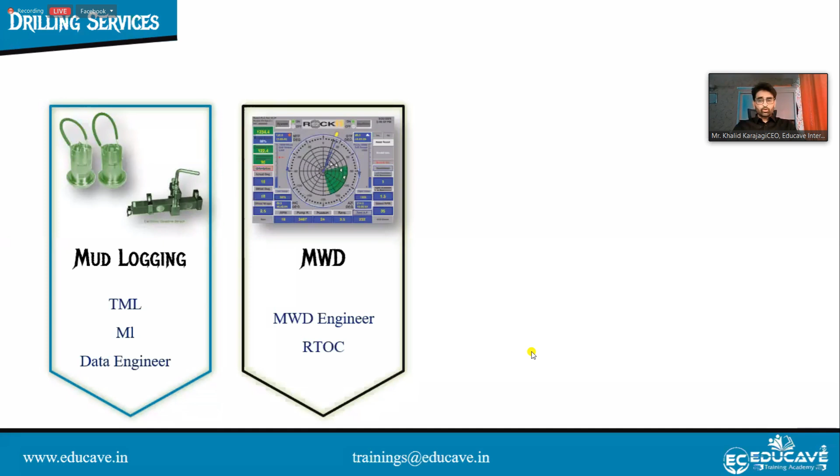Along with that, when we talk about the formation, we have LWD. This is a technology that we use to acquire formation evaluation data while the wellbore is being drilled. Unlike wireline operations, we get the data during the drilling operation. Formation evaluation data in real time really helps us take real-time decisions and reduce non-productive time by eliminating the need to halt drilling. If you want to conduct wireline logging, we stop drilling, we pull out of hole, and then we go in with the wireline tools. So compared to that, this saves non-productive time.

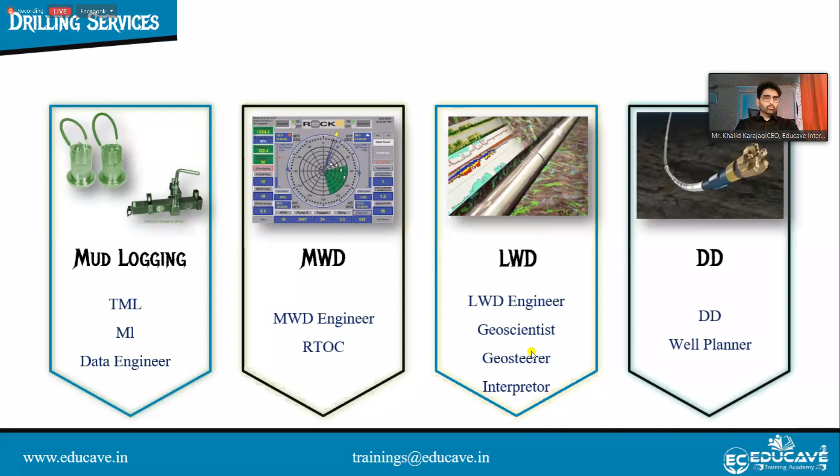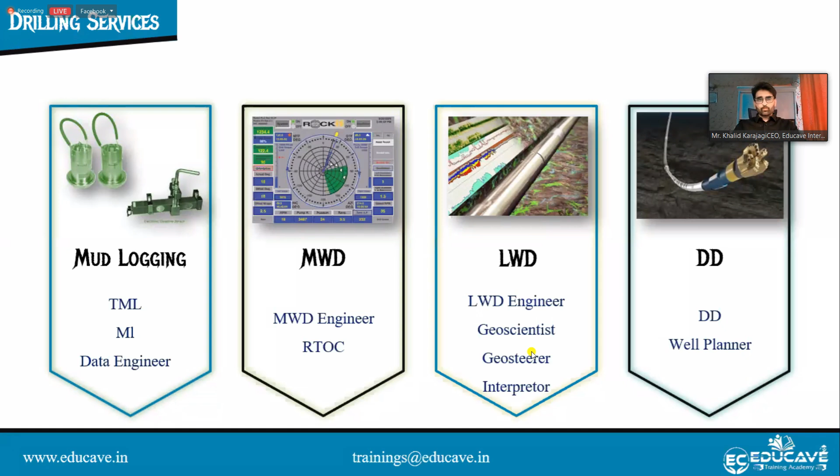Last but not the least is directional drilling. So on a macroscopic view, these are the four services that are used in drilling operations. There are a lot of job opportunities in these services now, so that was the reason this topic was chosen. So let's hope that we have a productive session.

To start with, MWD services. As we just talked, it's a service in which we get real-time instantaneous data from our non-mag MWD tool, which helps us with wellbore positioning. When I say wellbore positioning, it's all about directional drilling and drilling optimization. So with the help of real-time instantaneous data from the MWD tool, we can achieve wellbore positioning and drilling optimization. Most drilling operations nowadays have MWD services.

It's also a process of acquiring measurements from this kind of MWD tool, usually a non-mag tool. So why do we have non-mag? It's because there is one sensor in the MWD tool that can get affected by the steel body. That sensor is called the magnetometer. That sensor is very important to understand the hole direction, that is the azimuth. We have some slides on that, and we'll see how deep we can go in 1.5 hours. So basically, in MWD services there is an MWD tool which has sensors that sense the data and transmit it to the surface in real time.

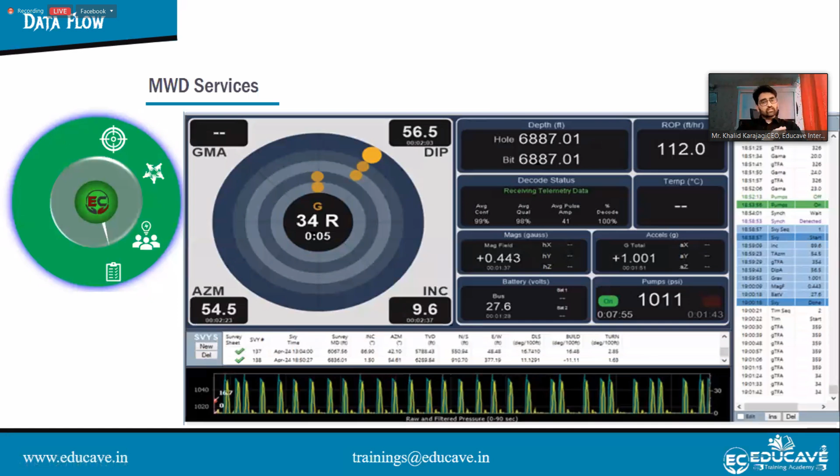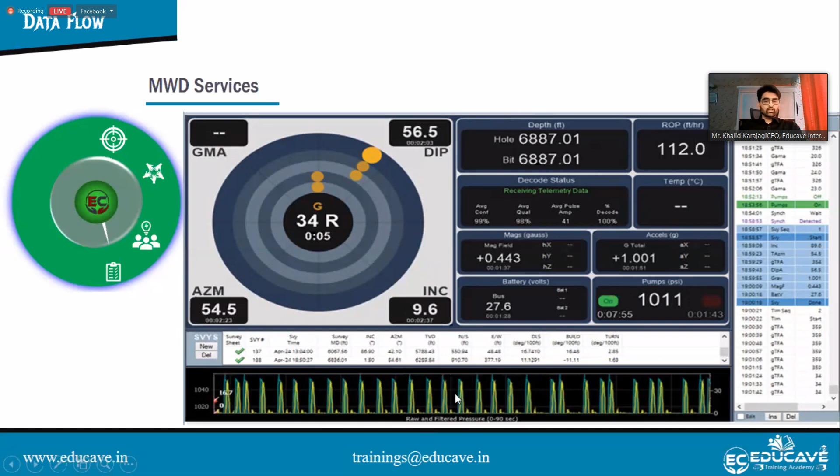So in MWD service, there is a tool that senses the data. Through the pulsar, you send that data to the surface. On the surface, there is a standpipe pressure sensor which acts as a receiver. From the standpipe pressure sensor, we get it through the cable. The pressure pulses travel to the standpipe pressure sensor, get converted to electrical pulses, and then we get it on the surface in our unit in this format. And that is how we get data, guys.

So this is the graphical representation of that. The tool senses the data and sends the data in binary format to the pulsar. This pulsar creates pulses. So how do you create pulses? Pulsar is basically a tool that has a poppet valve and it obstructs the flow of the fluid. When it obstructs the flow of the fluid because of your control valve assembly, there is an increase in pressure, and that increase in pressure is called a pulse. And this change in pressure is detected by your standpipe pressure sensor, and this is nothing but your pressure pulses.

So the pulsar, by obstructing the flow, let me check if I can show you. Okay, so there is a tool. This, for example, is the pulsar. There is a restrictor over here inside this, and there is something called a solenoid activated valve. This keeps moving up and down. This solenoid is spring activated. So once this valve body goes and sits in this restrictor, the flow of mud that is coming from the top, from the drill string, is obstructed over here. So the pressure was like this before when it was down.

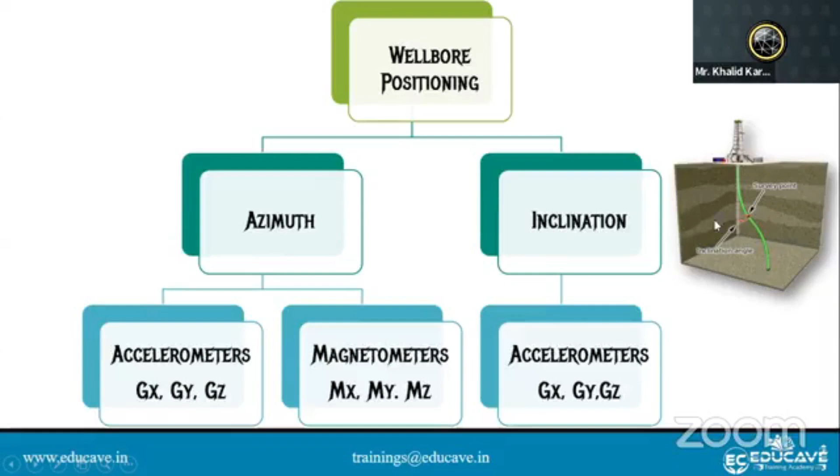Inclination is an angle measured in degrees, the wellbore to vertical plane. So whenever we say that, that means the inclination is 0 degrees. When we say that we are increasing the inclination, drilling a 90 degree well, that means the well is this way. So the inclination is 90 degrees. That is inclination. What is azimuth?

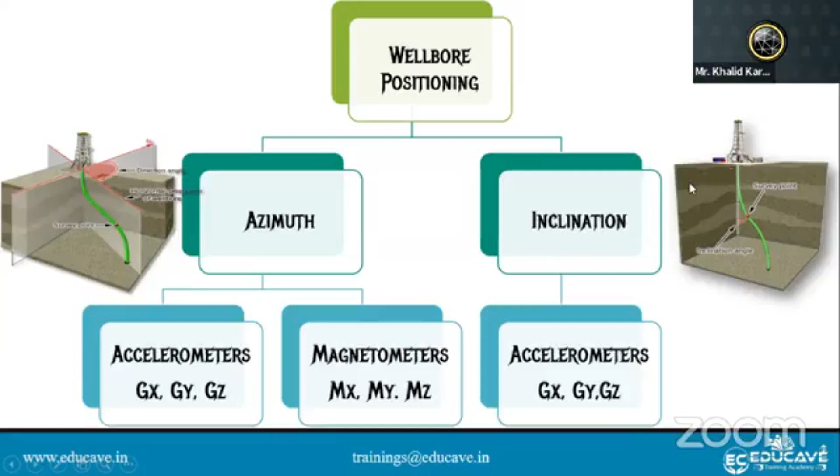Azimuth is the hole direction with respect to north. Is the hole going in this direction, in this direction, in this direction? That is called azimuth. So again, BHA placement plays a very important role, guys. For inclination, your stabilizer placement will play a very important role. For azimuth, your non-mag spacing will play a very important role, because as I told, the magnetometer is a sensor in the tool that calculates this.

However, if your steel body or drill pipes are near this particular tool, which is non-magnetic, there is a high possibility that it can magnetize the tool, and the data the magnetometer is getting is not only the Earth's magnetic field, but also of this. So because of this, it will not pass the quality check. As someone asked me, this is something that we check. So it might not pass the quality check, and that will let us know whether we have to accept the data or not. So this is wellbore positioning.

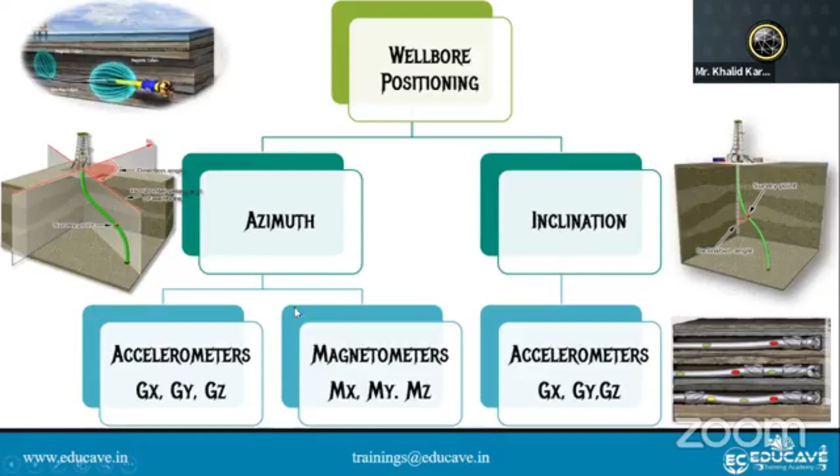Okay, can someone tell me how much time we have so that I can plan accordingly? What was told to you? Is it a 1 hour, 2 hours lecture? How much? Sir, it was from 1 hour to 1 hour 30 minutes. Okay, so we'll go ahead with a few slides. After 15-20 minutes, whatever we cover, we can take questions and answers. Sure, sir.

Okay, so with respect to drilling optimization, guys, for MWD, these are the 3 sensors we talked about. With the help of the pressure sensor, we understand the hole condition, with the help of ECD. With the help of temperature, we understand, for example, the sensor limitation with respect to temperature. For example, if while drilling the temperature is this and suddenly there is an increase in temperature, there is a vague interpretation we can make. There's only one fluid down there which is at higher temperature, that is formation fluid. If there is an influx, there is a probability that an increase in temperature might happen. So it's all about interpretation of real-time data.

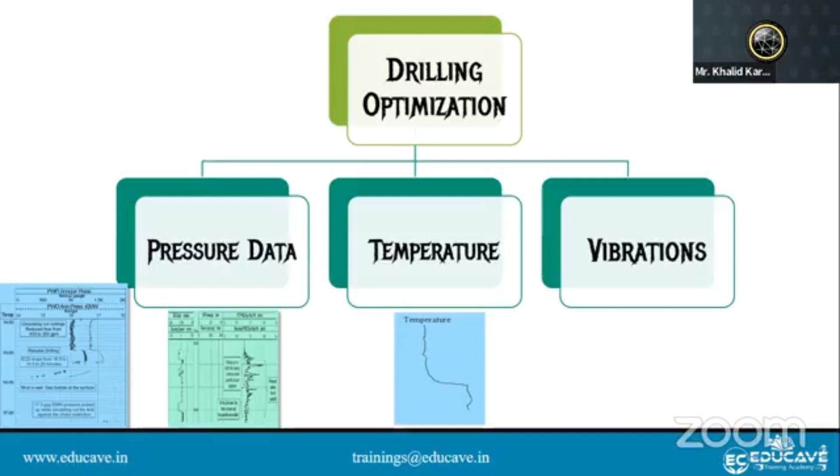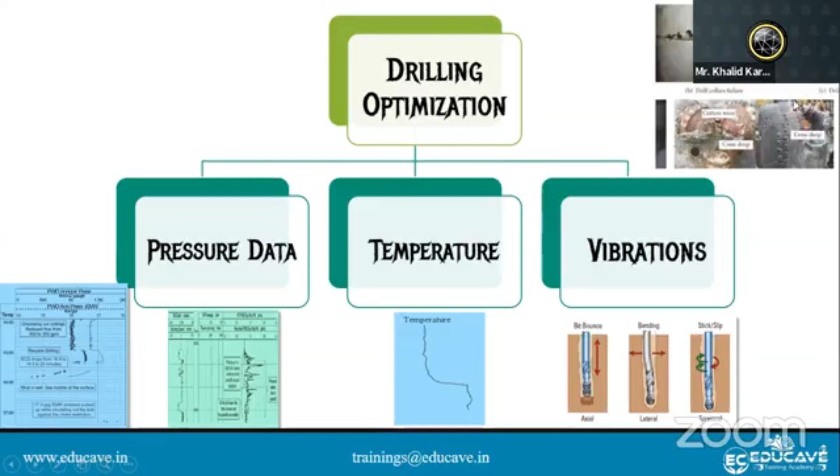And the third is your vibration. This is your bit bounce, that is axial, lateral, and torsional. So with this data, okay, this is the effect of your vibration, guys. The bit damage, the wear and tear of the tools and all. So with this kind of real-time data, we can interpret what needs to be done. For example, here, as I was seeing, there is an increase in ECD. And if you do not understand this language, what is happening over here, and you keep continuing drilling... What is ECD? Equivalent circulating density.

For example, if your drill cuttings are generated and they are not able to be lifted up and are accumulating in the annulus, there is a probability that this can cause an increase in ECD, a pack off situation. Because of this, there is a probability of downhole mechanical stuck up. So with these kinds of indications from your sensors like annular pressure, if you can read it, what you can do is stop drilling and use another function of drilling mud, which is to get the cuttings out of hole. So for all the cuttings that are accumulated, you can stop drilling, not generate more cuttings, and clean the hole. We call it hole cleaning.

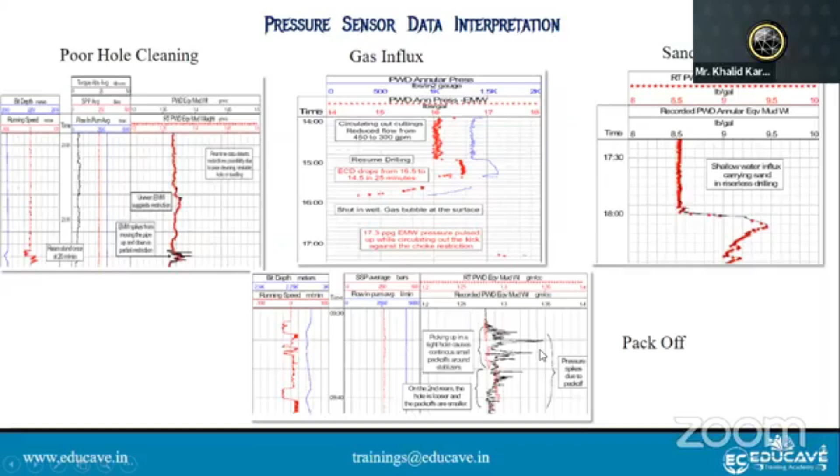So once you clean the hole, what will happen? The ECD will start coming back to normal. You're not generating more cuttings there, and you're not loading the annulus. So these kinds of interpretations can help keep the drilling environment optimized. Okay, talking about directional drilling, I won't get into much detail. As everyone knows, directional drilling is a service in which we try to achieve a target.

So there are 2 directional drilling tools the industry usually uses. One is your mud motor. Second is your RSS, rotary steerable system. So our job is not only to know what directional drilling is, like you know about inclination, you know about azimuth, but how to do it in reality. So with the mud motor, there is something we call tool face.

What is tool face? Tool face is an angle which describes where the mud motor bend is pointing. If you know this direction, you can control the bit walk, or you can control the bit direction. So if you want to increase the inclination, for example, you need to know what the tool face is. If I keep the tool face at 0, the inclination will increase.

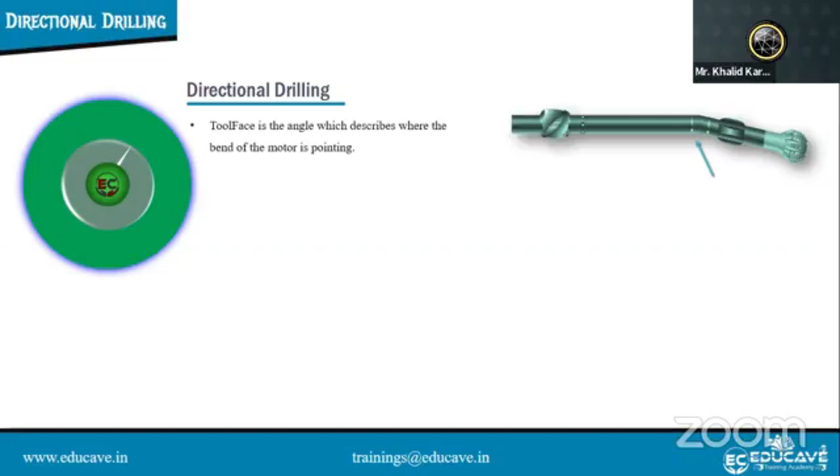If I keep the tool face as 180, the inclination will decrease. If I keep the tool face as 90 degrees, then the inclination will not change, but the azimuth will change towards the right direction. So you should know about this also in directional drilling. This is what I was talking about. Because we get only one chance to put the hole in the right direction, guys. In our industry, this plays a very important role. You cannot mess up with this data.

And all this data, the tool face data and all, we get it from the MWD tool itself. So no directional drilling can happen without MWD services, because the MWD tool is the tool that helps us to understand what this tool face orientation is. Okay, so this is about directional drilling.

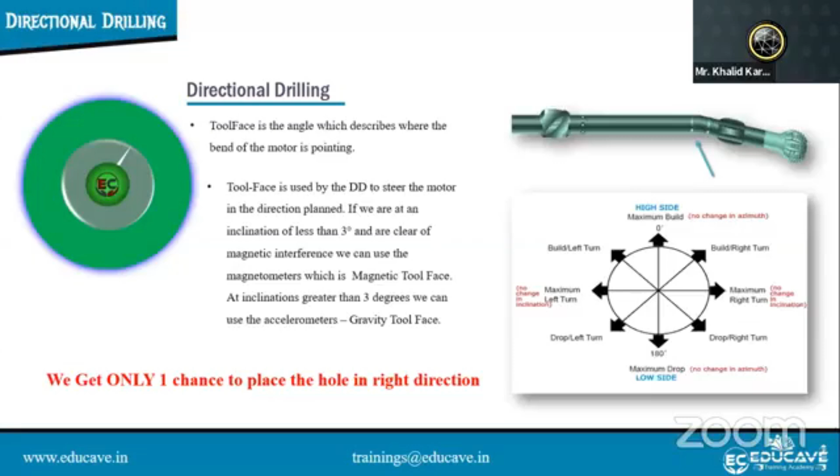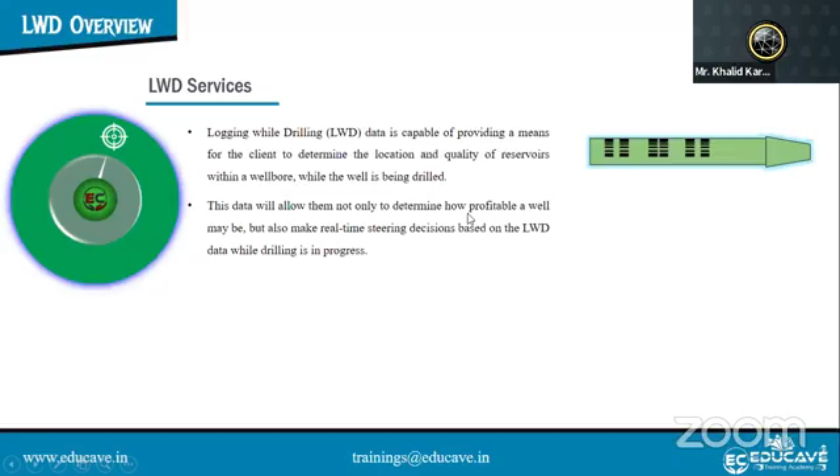Okay, as someone talked about LWD, we already talked about it. LWD is a service in which we get real-time data of the formation, nothing related to directional drilling, nothing related to drilling optimization. Any tool, any service that gives you data about the formation, that is logging while drilling. So this data will allow us to understand where we are drilling. Do we really have hydrocarbon present out there? If yes, how much, and everything.

So for LWD, why does the industry need LWD services? Because they want to know, can they make money? When they say money, they want to know, is hydrocarbon present there? If yes, where it is, how much it is, and can they produce it economically? To get the answers to these questions while drilling, we use LWD technology.

With this data, they try to take decisions of optimized wellbore positioning, of reservoir characterization, so all this data is used for high value decisions. So it is very, very important that this data that we are providing in terms of logs is high accuracy, comprehensive, quality data only.

As a petroleum engineer, as a geology student, understand one thing, guys. A tool is developed to give you raw data. The tool gives you raw data. To convert that raw data into quality data, it is your job, because you need to understand the downhole effects, the borehole effects a tool can undergo. Only once you understand that can you apply corrective action. For example, what I'm trying to say here is,

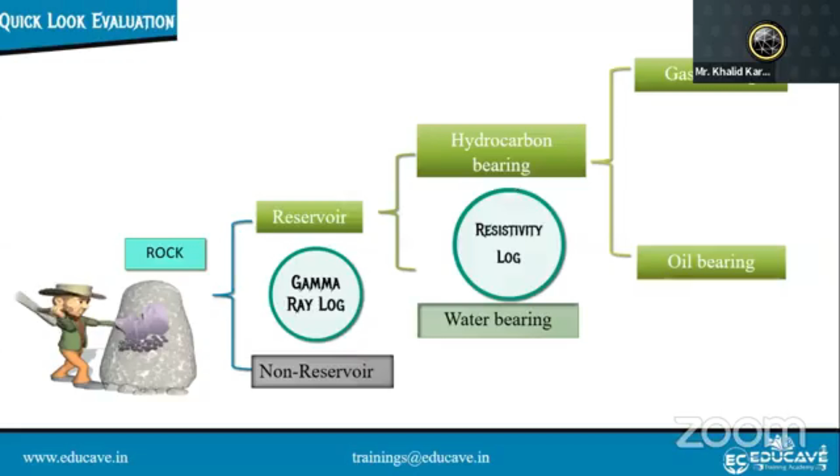So as a petroleum engineer, I would suggest not only to understand, for example, what you guys understand. Okay, when we are drilling a rock, if I want to know whether it's a reservoir rock or non-reservoir, whether it's shaly or non-shaly, there is the gamma ray tool. Once it's reservoir rock, whether this reservoir is water bearing or oil bearing or hydrocarbon bearing, we have the resistivity log. Once we understand it's hydrocarbon, whether it's gas bearing or oil bearing, we have neutron porosity and density logs. This is what you have studied, but this doesn't end over here.

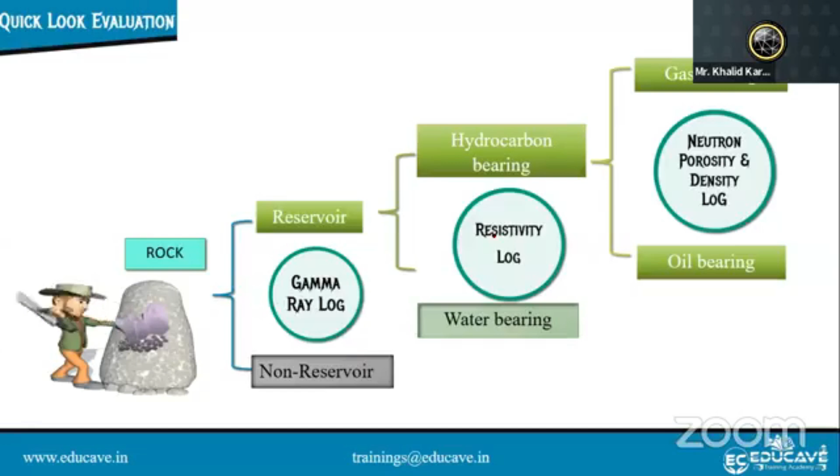You need to understand the resistivity log, what are the different resistivity logs, which are the different curves in resistivity logs, what is attenuation, what is phase difference, all these things you need to understand. So I think the time is limited, but I would suggest, Zaki, if students are interested, try to get a logging while drilling webinar also, because there's a lot involved in it.

For example, if this is the log, right? This is a gamma ray. The gamma ray log is basically used to understand whether it's a shaly formation or non-shaly formation. So I'll just give you a brief idea. What is gamma ray? Gamma rays are naturally occurring radioactivity emitted by isotopes like potassium, uranium, and thorium. Potassium, uranium, and thorium are mostly in the clay particles. So whenever there is high gamma ray, there is a probability that potassium, uranium, or thorium are present. So this is shaly. High gamma rays are usually termed as shaly formation.

Low gamma rays, non-shaly. My zone of interest is this in the first track in quick look interpretation. Once I understand it's non-shaly, I check the resistivity. Resistivity is a log that tells us whether it's a water-bearing zone or hydrocarbon-bearing zone. As of now, I'm just trying to give you a layman explanation. If there is water in a room and I apply current, the current passes through the water because water is highly conductive. Highly conductive means less resistive. Hydrocarbons, on the other hand, are highly resistive.

So see, this becomes my zone of interest. High resistivity is an indication that it might be a hydrocarbon bearing zone. Then we go and check the neutron porosity and density. If there is a crossover in your neutron porosity and density, it is usually a hydrocarbon bearing zone, I mean to say a gas zone. If they are overlapping, there might be a possibility of an oil zone. So this is how we do a quick look interpretation for any log.

Out of these curves, there is one curve which is true resistivity. If you do not take that curve value and take some other curve, the whole saturation goes wrong. The whole interpretation goes wrong. So you need to know that also. You also need to start from basics. These are depth versus data. How do you get a log?

If someone asks you that, a tool, say for example, this is a gamma ray tool. A gamma ray tool has a sodium iodide scintillator detector. So this tool will only understand what the data of this formation is. It doesn't know what the depth is. So you should know how you get a log. A log is always the formation response at what depth. How do you get it? You get it with the help of drawworks sensors and hook load sensors.

So for example, on surface, there is a drawworks sensor and hook load sensor, which tell you at what time, what is the depth. For example, currently it is 3 hours, 15 minutes. The depth is, say, 2136.80. So on the system, I can see this. So from surface, I understand at what time, what is the depth. The tool has a clock inside.

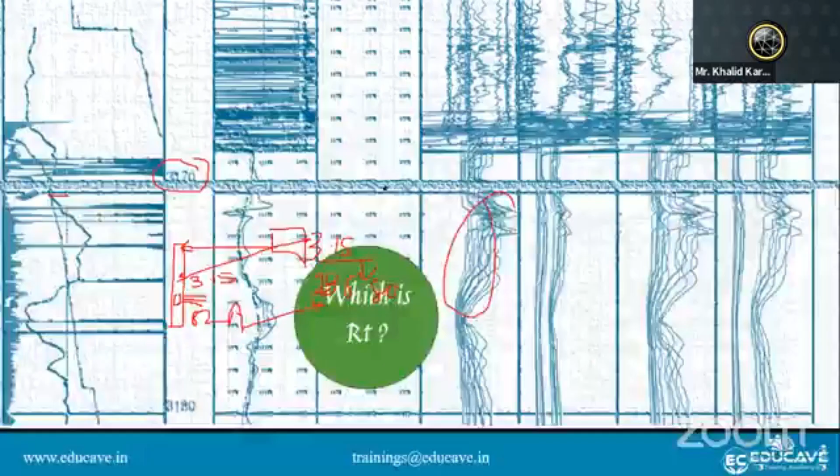I can talk about gamma, resistivity, porosity, density a lot. But now I hope if you ask questions, we can talk on it, because this was mostly an overview presentation on the drilling services. It was an effort from my side to make you understand. It's not only about understanding the definition. It's about, okay, if gamma ray is there, you need to understand what corrections are required. What do you mean by attenuation? What do you mean by 2 megahertz? Why is there separation in curves? So all these things you need to understand. So I hope I can take good questions now.

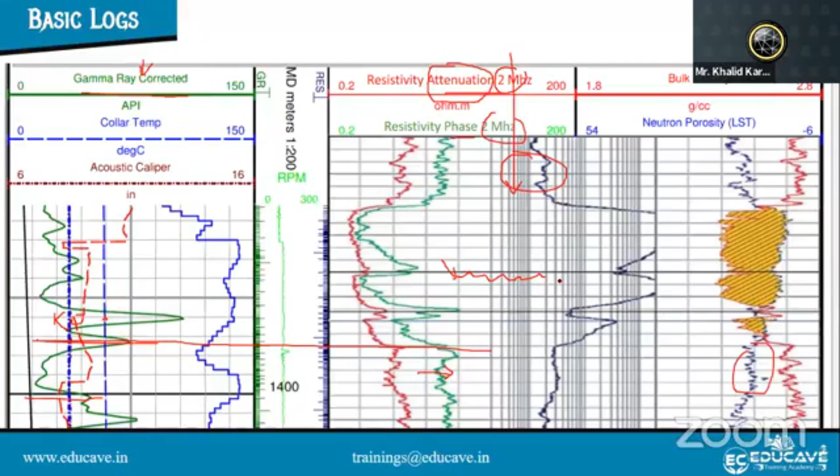So feel free to ask your questions. I'm ready to take the questions now. Any questions as of now? Yes, sir, there are questions. Okay, let me check. How do I check it? Sir, we will convey the question to you. You just answer them. Okay. Just a second.

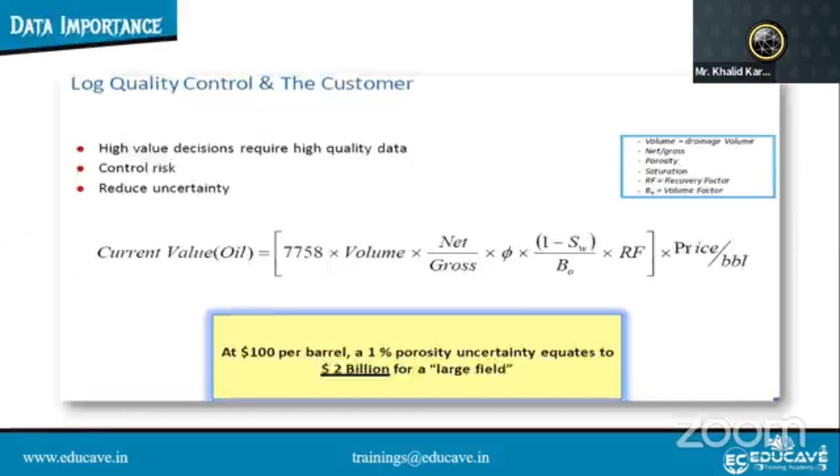So if you see this, where is that? Okay, if you see this log, this curve, 2 megahertz, is a curve that can tell me about thin beds also. This curve will tell me about depth of investigation.

What is phase and attenuation? Phase and attenuation, as I just told you, this is attenuation and this is phase difference. Again, these two have a property. This is an electronic property. To give you a brief, I always call it I effect. I effect means I call this I as in P. P means phase. It is an electrical property of phase that it investigates vertically.

Attenuation has a property to investigate radially. So who will have more depth of investigation? Attenuation will have more depth of investigation as compared to phase. So now, okay, I'll take this. I'll show.

Okay, there are two families in resistivity, I'm giving you a layman explanation: depth of investigation curve and vertical resolution curve. Depth of investigation means something that reads more deep inside the formation. So with respect to 2 megahertz and 500 kilohertz, who will read more deep inside the formation? 500 will read more deep inside the formation. And 2 megahertz will read thin beds well.

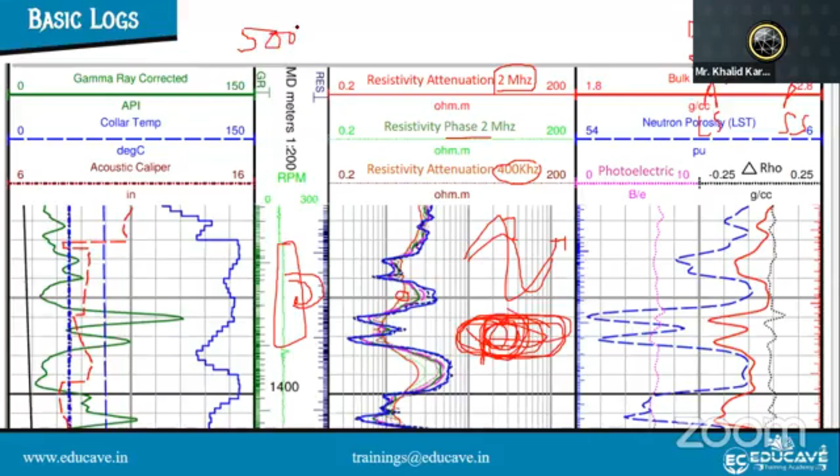Now, let us see this curve. A resistivity curve of 400 kilohertz, attenuation, long space is the curve that will read more deep inside the formation as compared to a resistivity curve of 2 megahertz, phase, short space. So if a geologist asks you to give a resistivity curve which has an ability to read more deep inside the formation, you will give him this curve.

If geologists ask you to give a resistivity curve which has an ability to read thin beds also, you will give him this curve, 2 megahertz phase difference. For true resistivity, usually in industry we give 2 megahertz phase long space. It's a combination.

So there are various effects a resistivity tool undergoes because of which the values are different and the curves start separating. Those effects, in the field, I remember as A, B, C, D, E, F, and SHIT. These are the effects a resistivity tool can undergo.

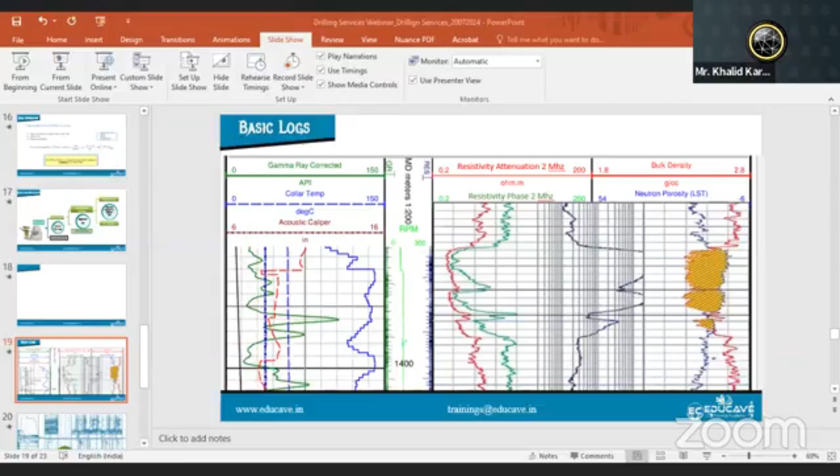Are tech courses must required to study for a job in the petroleum industry? The courses are not must required, guys. You need to understand nowadays a lot of platforms are coming up with courses, along with Educave. But personally, being a face of Educave, I always tell one thing: keep courses as the last option. What is must required is that you need to get knowledge from somewhere or other. Get it from professors, get it from college, get it from online, get it from anywhere, but get the knowledge. If you do not have that knowledge, you will find it very difficult to clear those technical interviews.

That was the reason Educave came up with this thought process of training the students only from field engineers. We are proud to say that we are a platform that has field engineers training the students. So whatever skills are required in those 12 hours of shift, we train the students exactly that, the job oriented courses. So courses are not must. It's good if you want, you can do it, but if you don't want to do it, get some alternative and get knowledge for that.

I'm a fresher. What are the interview questions that we will get for the HR or the management? Okay, so when you talk about HR, HR is someone who tries to understand what your personality is. So there are basic questions from HRs, right? They first try to ask you about yourself, then what are your 5 strengths, your 1 weakness, where do you see yourself in 5 years and all. So these are very scripted questions, but there's a lot they judge about your personality.

I'll just give you a small example. If I ask you, what is your 1 weakness? The answer I usually get during the interview is, guys just try to portray that I'm very short-tempered, I'm very lazy and all this stuff. When you answer to an HR that I'm very short-tempered, what HR hears is that if he is a short-tempered guy and I put him in a team, there is a high probability that there will be issues in the team. He will not take you. He judges you from that.